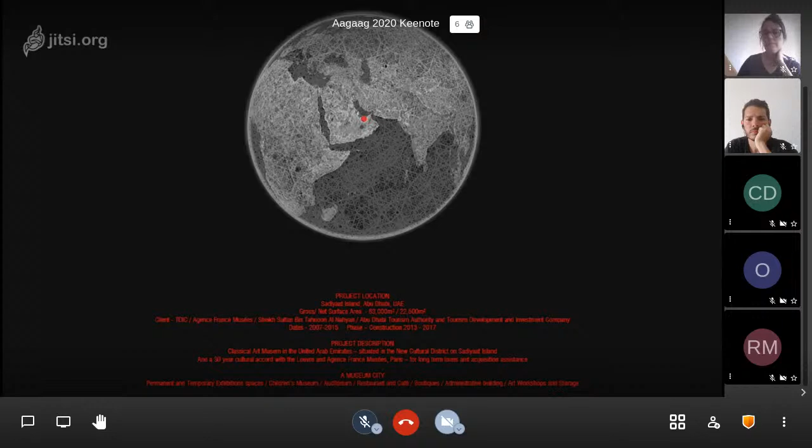The building is a classical art museum, and it's situated in the new cultural district on Saadiyat Island. There's a 30-year cultural accord with the Louvre and Agence France Muséums, Paris, for long-term loans and acquisition assistance. The museum is considered to be a museum city. It has permanent and temporary exhibition spaces, children's museums, auditoriums, restaurants, cafes, boutiques, an administration building, and art workshops and storage areas.

Saadiyat Island was conceived as a cultural district. Several well-known architects were to build renowned projects on the island. The AJN project is the Louvre Abu Dhabi. The Frank Gehry project, Guggenheim Museum, is also under construction, and there would have been, or will be, a performing arts center by Zaha Hadid, a maritime museum by Tadao Ando, and a Zayed National Museum by Foster and Partners.

Generally, when we begin a project, there are many areas of research for the concept of the design. And most of these areas of research are based on the content and the specificity of the place. There are three grand areas. One is the place, the geography, the history, the culture. In this case, it's where the desert meets the sea and that border. We also look very closely at the history and the typologies, and in this case, the museum city and the layering of the archaeologies of the area.

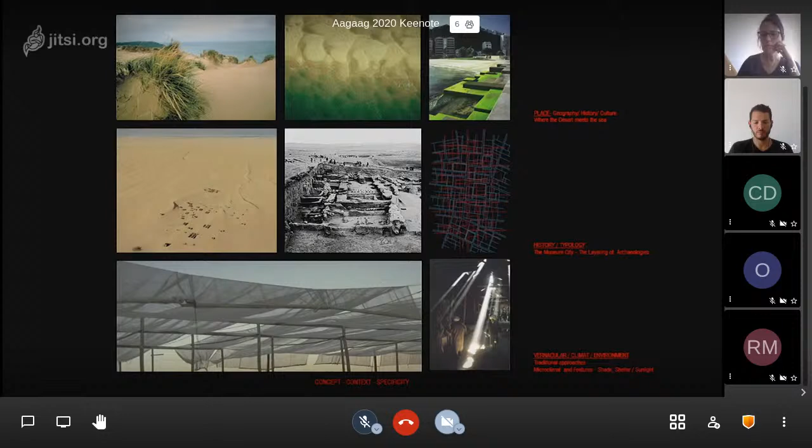And then there's the vernacular, the climate, and the environment. These are ways of looking at traditional approaches and dealing with the microclimate and features such as shade, shelter, and sunlight. These are some of the initial sketches done by Jean Nouvel. These are some of the initial massing plans, and there are two key elements. There's the water element, which is the blurring of the boundaries between the desert and the sea. And the second key element was the dome, and that was the incorporation of very specific light and shade.

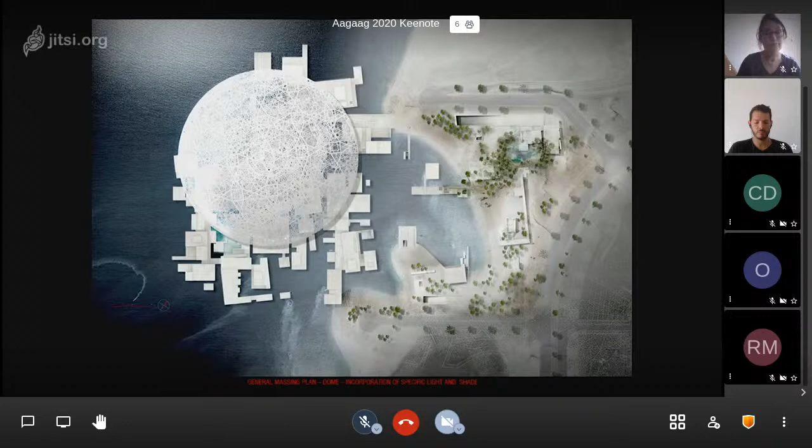The basic geometry of the dome. The dome is a slice of a 349-meter diameter sphere with a span of 180 meters and a rise of 25 meters. At the base, there's a support, a belt truss, which is 6 meters deep. There are also 4 structural support elements which span 110 meters between supports, hidden within the buildings of the museum. The primary structural grid is a structural steel space frame, 6 meters deep, made of 10,000 structural components, pre-assembled into 85 supersized elements, each weighing on average 50 tons.

Structure and cladding. There are 8 layers of cladding: 4 outer layers clad in stainless steel and 4 inner layers clad in aluminum. There are 7,850 unique stars, creating a layered series of geometric patterns, allowing for approximately 1.8% of the dome to be perforated. The base pattern is an isosceles triangle, repeated, rotated, scaled up and down to form a system of squares and hexagons. The pattern is then mapped onto the dome surface to be true at the apex and distorting outwards towards the perimeter.

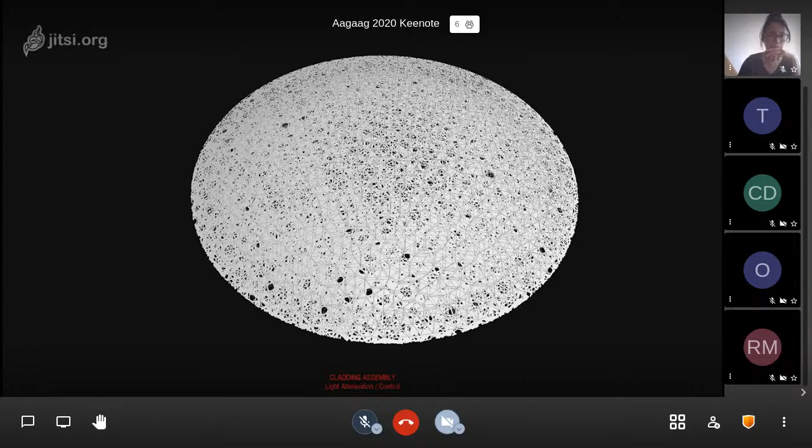And these are some of the studies and the long research that was done on the different openings within the dome. And images from the exterior of the museum and the dome. The dome acts as a light filter as well as a light source. And the research that was done through various mapping techniques.

There was a light attenuation map to analyze the light and temperature controls, an inverse lighting analysis, which analyzed the light and shadow, and a transparency map, which analyzed the perforations mapped out and translated. So these are views of the lights moving and the patterns moving and the different types of patterns throughout the day. And these were calculated with the angle of the light and the incidence of the type of light as well as the type of pattern.

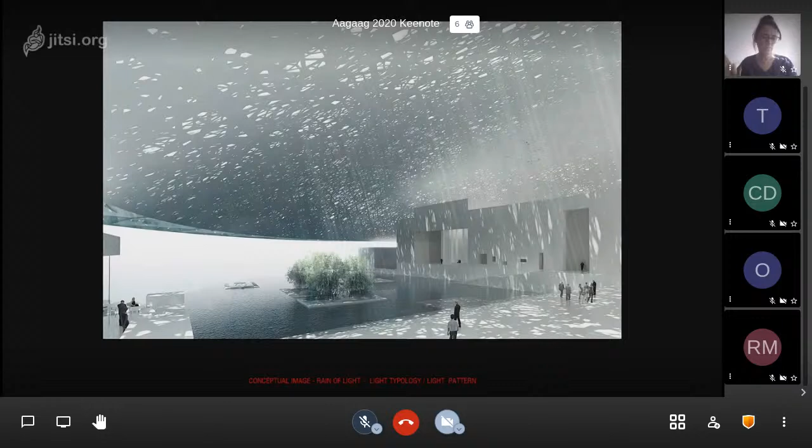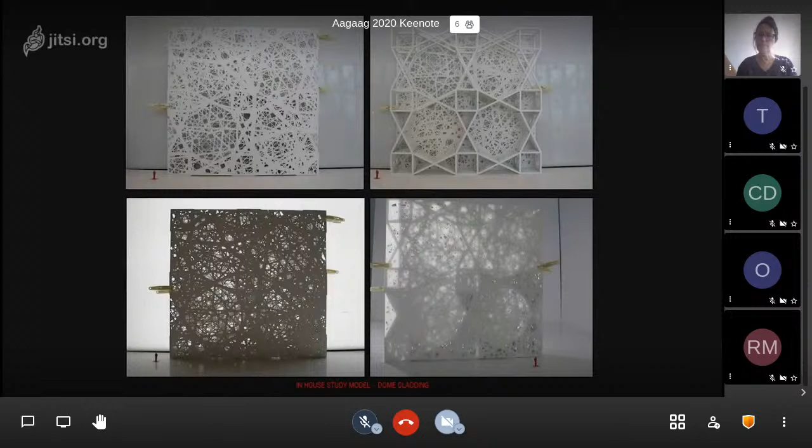And this is a conceptual image of the rain of light, the light typology and the light patterns. We did many study models, some in-house, to analyze the light, shadow, as well as the different perforations. These were done outside of the office. There was a prototype model done at 1:33 scale. And then there was a full-scale mock-up and prototype.

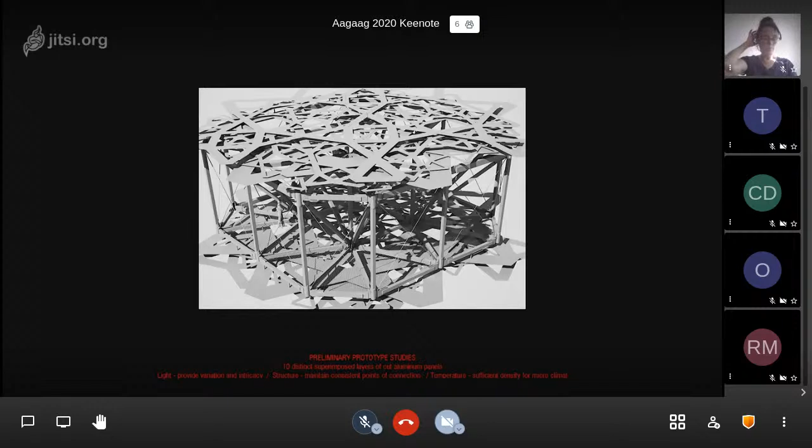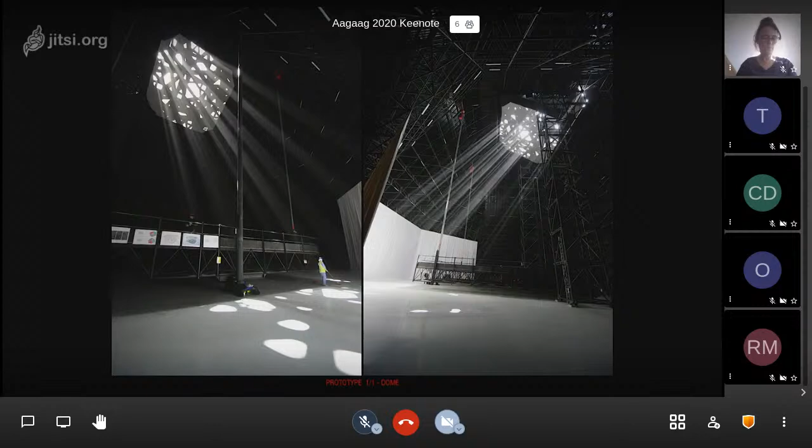And this is a view from the interior where the analysis was done on the different lines of the rain of light, as well as the light that was captured within the dome itself, and mostly the patterns on the floor and the walls as they moved throughout the day and changed their sharpness and their forms. We constantly refer back to the conceptual images while we're doing these studies to keep in tune with the original ideas that were put out in the 3D renders.

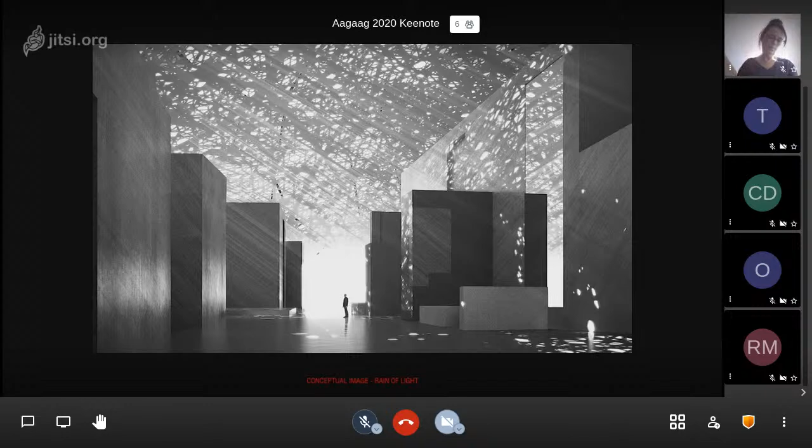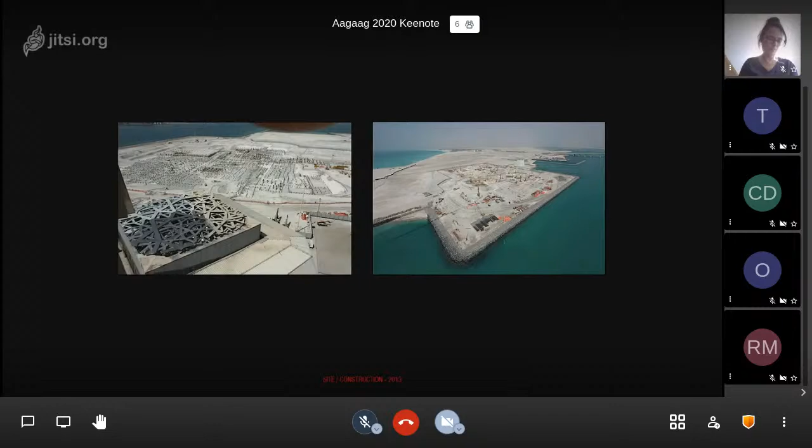So these are the first images of the construction site with the prototype to the left. The first images of the dome with the museum underneath, under construction. The patterning of the stars as they go into place on the dome. The positioning of the stars and the different layers. A view from a distance. And the last piece of the dome cladding was installed in 2015.

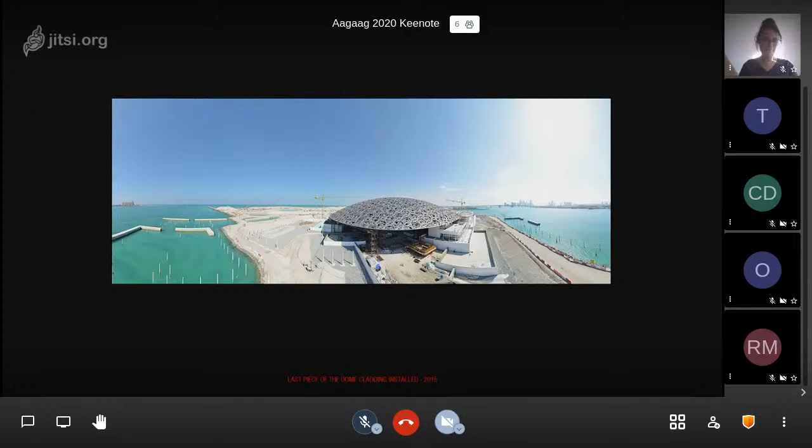And these are views of the final project from the interior inner courts out towards the sea. The inner courts looking up towards the dome, as well as the gangways inside the dome. And then the light patterns. So once again, the light was not just a rain of light. The light was also captured within the dome and lit up areas of the dome.

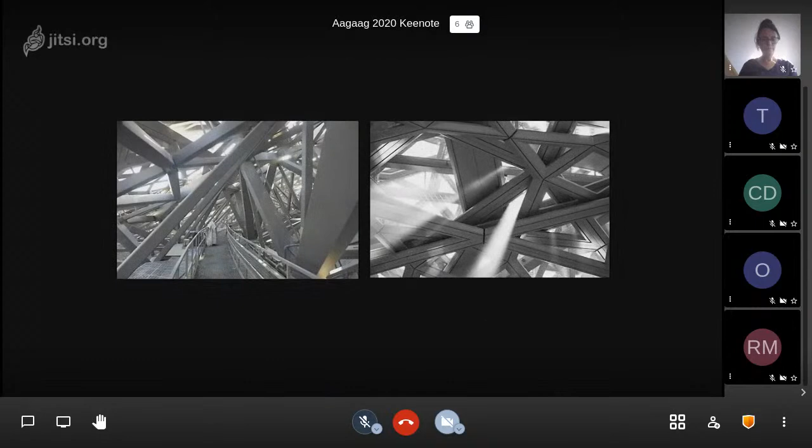But mostly the analysis was also on this kinetic form of light as it was transferred through the dome onto the areas below. How it moved, how it vibrated with the water patterns and the angling of the sun. At the end of the day, the patterns became very long and very soft. In the morning, they were sharp and much more concise. These are on the water areas. And as the sun goes down, the night views also have a kinetic to them, as if this was a celestial vault. The stars come out from underneath the dome.

We're moving now to Paris. And we're going to present the project called Tour Duo. So the client is Ivanhoe Cambridge and Hines, and the program is offices and hotel and retail, and a restaurant on the upper part of the first tower. We won this competition in 2012, and the construction started in 2017. We are going to deliver this project for the end of the year.

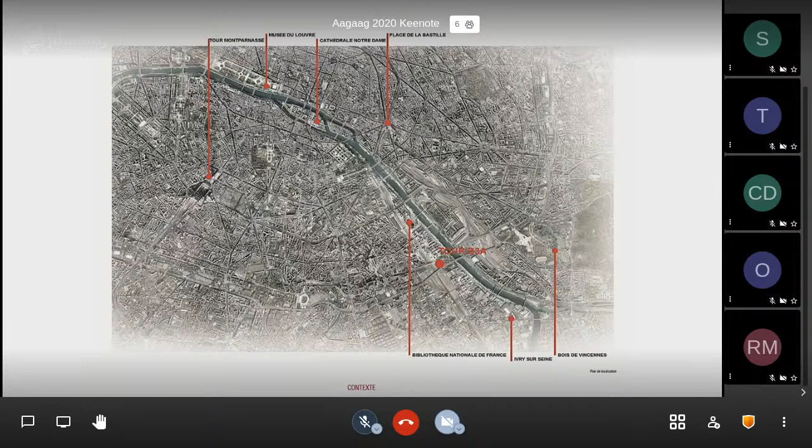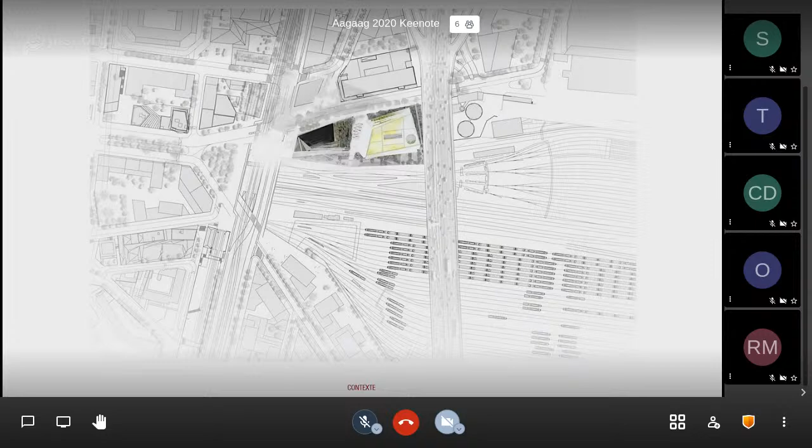So located in the eastern part of Paris, near the Seine, Duo is composed of 2 towers and a large public plaza. They are the last buildings at the end of the Avenue de France, and they are facing the Ring Road and an impressive opening on the railway. So the very idea from Jean Nouvel was to reveal this urban landscape, invisible from the ground. All the movement from the trains and cars crossing the bridge has to become part of the tower's identity.

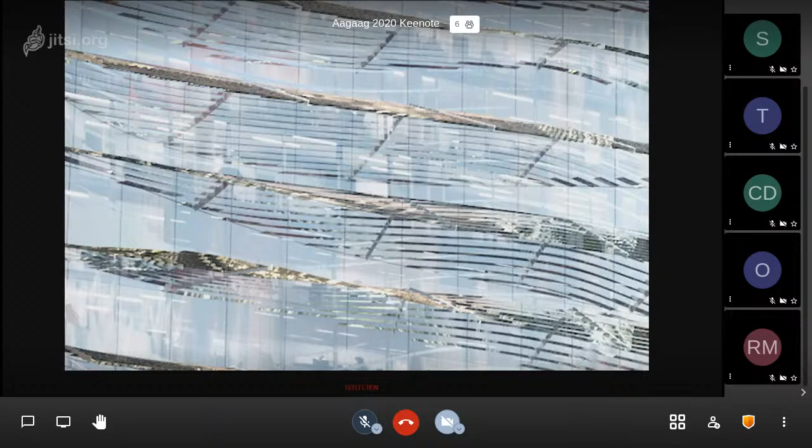So the project geometry starts from this intention to play with the reflection. At the very beginning, we wanted to create dynamic patterns composed of the reflection of the surroundings. Sometimes it could be really clear and sometimes more abstract, and to have an interaction between the inside and the outside of the building. In order to reveal the tower from the main avenue and capture the reflection of the ground activity, Jean Nouvel decided to dramatically incline the towers.

As you can see in this picture, the tower is slightly coming into the street. And all this inclination permits us to emphasize the reflection of the trains and the cars. Here are some renders from the very beginning of the project. So from the Avenue de France.

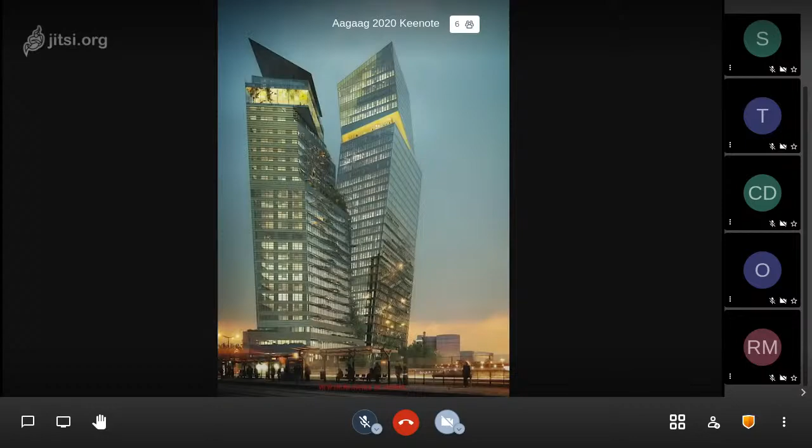And here from the Ring Road during the day and during the night. What is really important too, once the massing is decided, is the vocabulary. The vocabulary is each piece of this building had to refer to the world of train, vegetation, and moving lights.

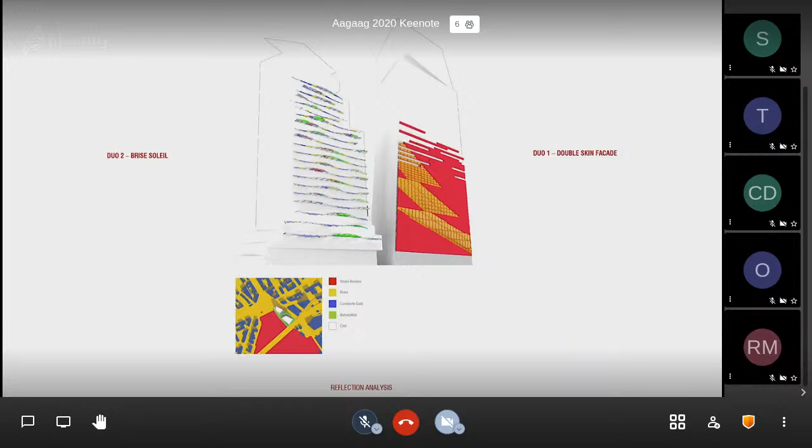So we chose to illustrate through two key elements of the project: the reflection of the double skin facade of Duo 1, that is the tower on the right side, and the curved brise soleil of Duo 2 on the left side. So the first step was to precisely map the context to validate and control the initial idea.

So here on Duo 1, we decided to use a double skin facade, and to realize this intention, we composed the facade thanks to 8 families. The first skin of laminated glass is porous and designed to both control thermal condition and reflect the context. The second skin ensures the air tightness and the fire protection thanks to the catwalk and the shadow box.

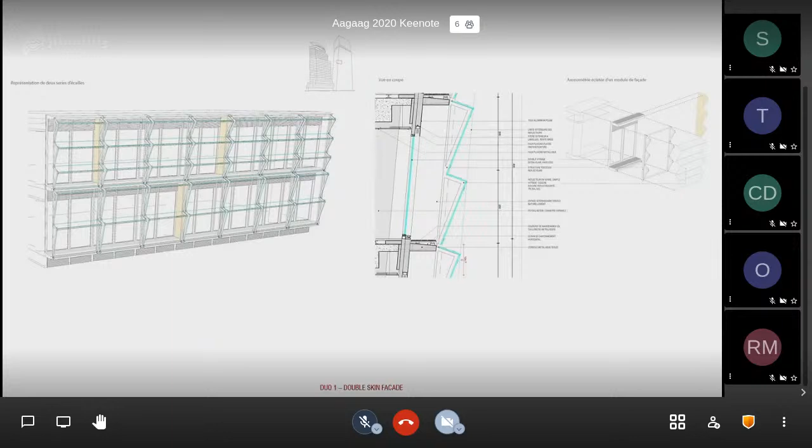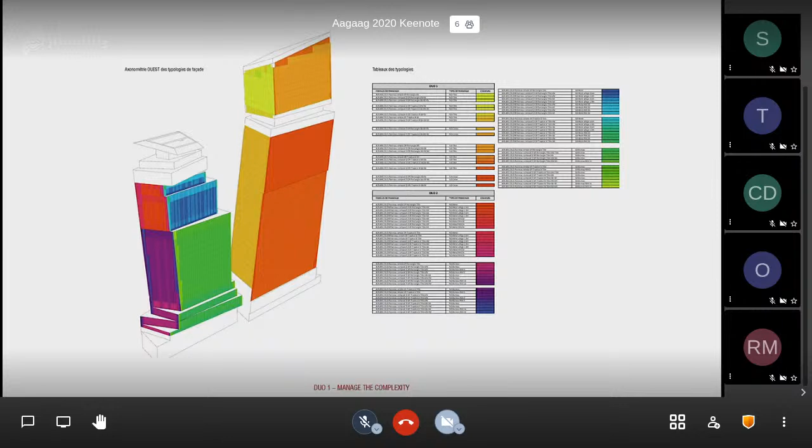All those geometries are drawn in a BIM model in which all facade families are precisely referred and informed. In this BIM model, we have all the information about the curtain wall and all the information about each piece of glass. So if there is an element like the height of the floor that is going to change, we are able to adapt all the project.

One important point was to control the impact of the sun reflection on the ring road, and so we adapted the scale and the angle to comply with the city ring road requirement. As you can see on those slides, we are sure that we are not going to have any issue with the cars because of the reflection of the sun on the road.

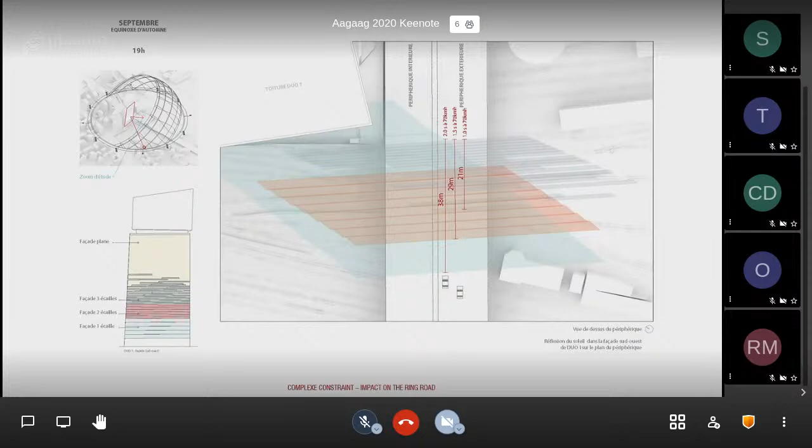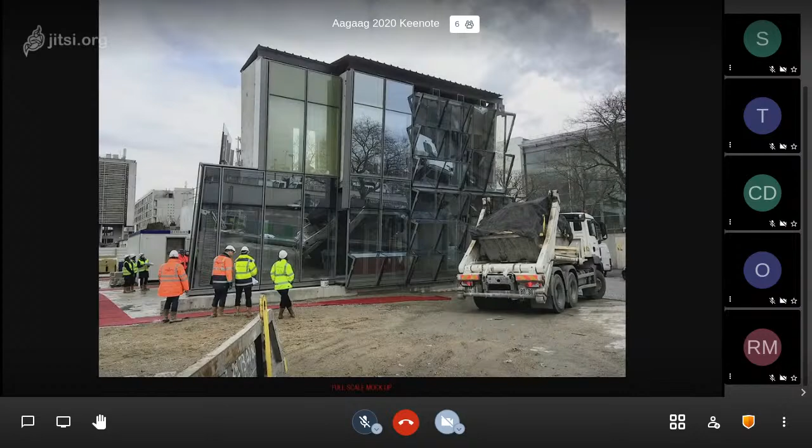We always control the geometry thanks to renders and thanks to visual mock-ups, like small 3D printed prototypes like this. And when it's decided, we jump to the full-scale mock-up, as you can see here, and we were really happy to see that the effect that we were looking for was present.

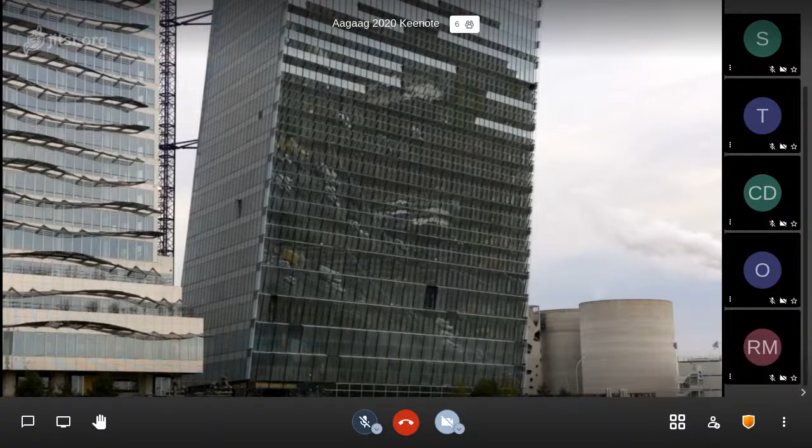Here we are going to present you a small video because this effect was really important for Jean Nouvel as a dynamic effect. And all the cars are visible from a pedestrian point of view, and so all the context is revealed thanks to the tower.

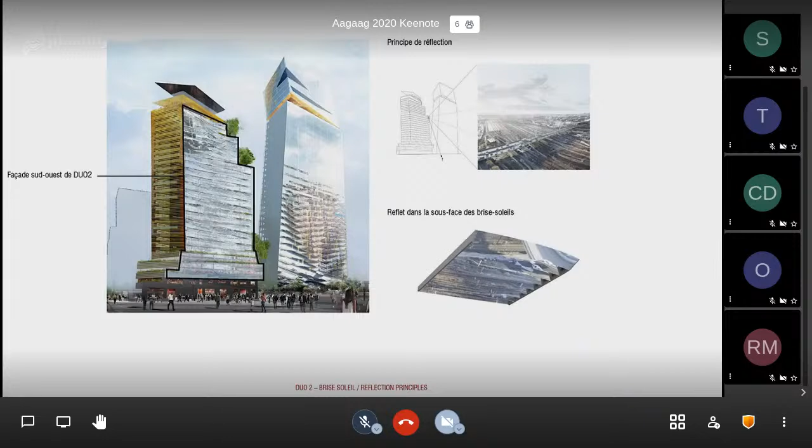The second element is the brise-soleil of Duo 2, and in order to realize the intention of this wavy reflection, we imagined a highly reflective curtain wall with a curved brise-soleil. The geometry is a balance between needed solar protection, clear view visibility wanted from the client, and important structural constraints, especially from the wind.

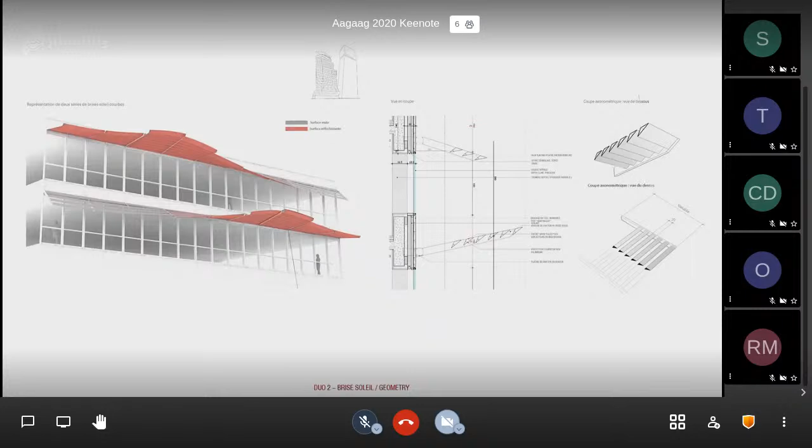Each blade is a 3-meter aluminum triangular profile combined with a 2 millimeter thin sheet of reflective steel. We control all the time the effect from the inside too, with this render, for instance. And all the geometry is coming from a complex computational design which takes in consideration the initial graphic wavy idea and the construction constraints. Here, from the generative surfaces to triangular profile and to curvature optimization.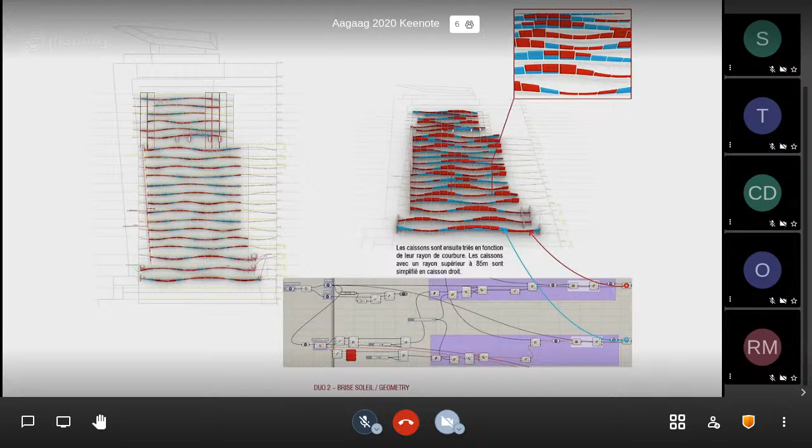Indeed, to reduce the cost, we sorted all the blades according to the curvature and achieved a simplification of 50% of the blades, that we transformed to straight profiles. Here is a render video to control the large-scale effect. And it's like if you're moving away from the tower and all the surrounding is playing with the sky and everything is moving into this facade.

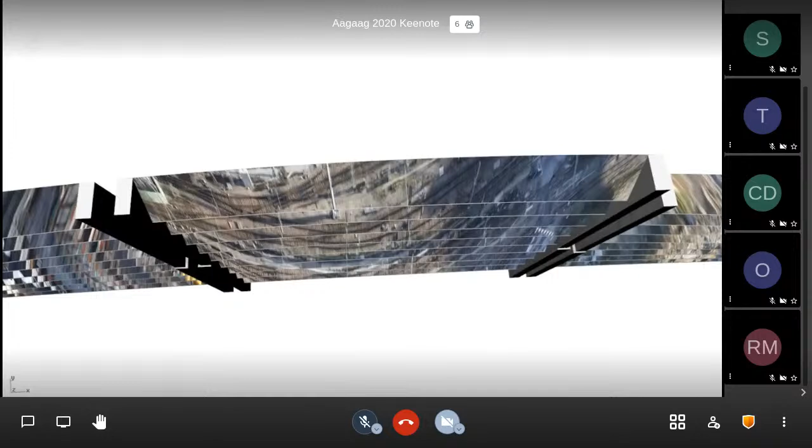When you're getting a little bit closer, you can start to see the context and how the railway is creating a really abstract motif thanks to this triangular element and the reflection of the brise-soleil.

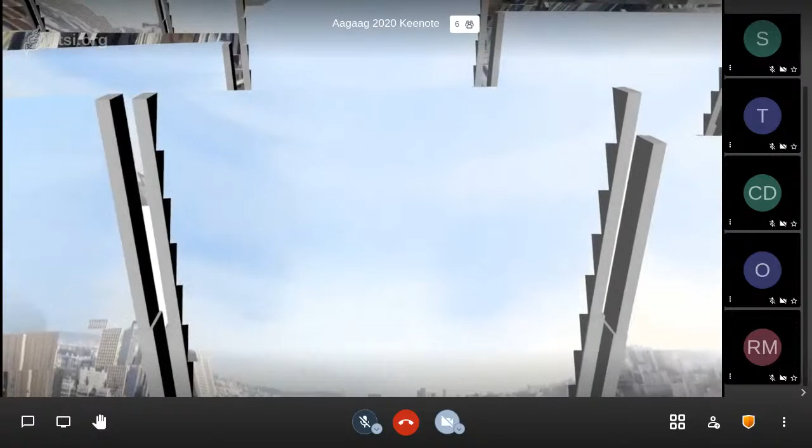So all these elements are confirmed thanks to models and visual mockup again. So this is the really first visual mockup we made. So it's 3 pieces of aluminum. We tried in steel, in aluminum, different metal. And here is this 1-scale blade in reflective steel. Full-scale mockup, and some images of the construction.

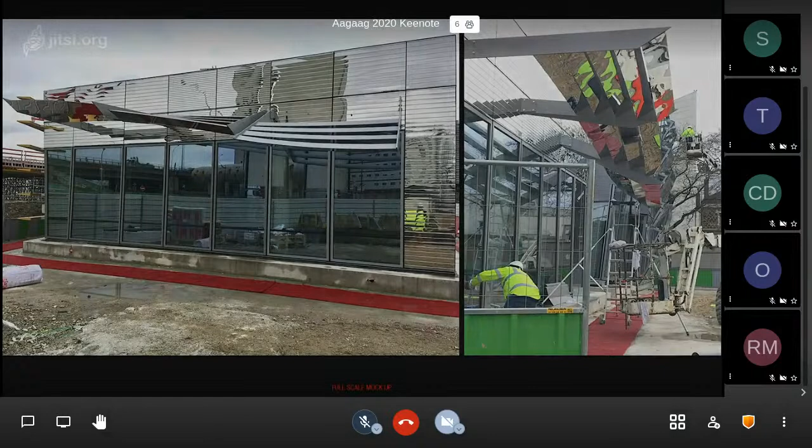From the Avenue de France, we slightly distinguish the facade and the brises. And when you arrive near the tower, the effect becomes more powerful, and the surrounding is playing into this facade.

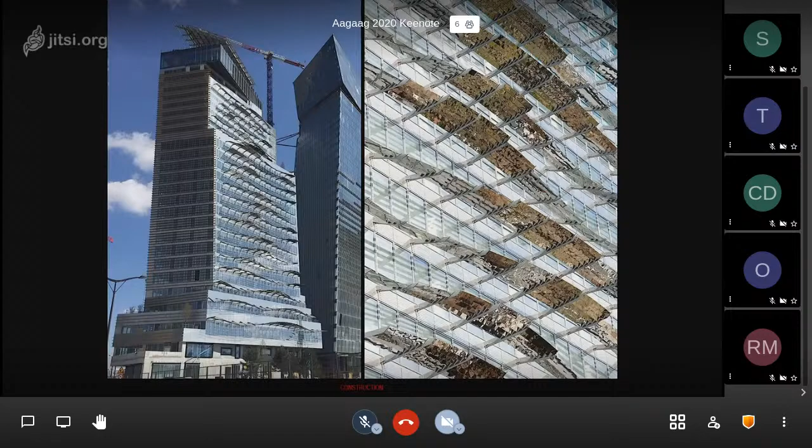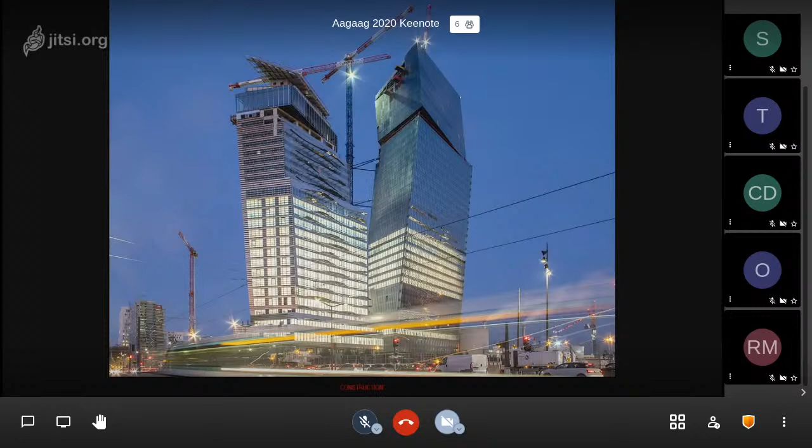It's really interesting to see it by night too, because when you're on the plaza, near the tower, you can see the light of the train going through all the facade. This is basically 1 week ago, and as we said, this project will be delivered by the end of the year.

The next project and final project is the Matarazzo Tower in Sao Paulo, Brazil. One of the original rendered images, conceptual images. So the location is the capital, Sao Paulo of Brazil. The project gross to net surface area is 54,000 square meters to 36,700 square meters. The height of the tower is 93 meters.

There are 22 stories. The client is Alexandre Allard, and the design dates were from 2012 to 2016, and construction from 2017 to 2022 will be the completion date.

This project is a renovation and a redevelopment of the historic buildings of the Matarazzo Hospital and site into a multi-use hospitality, office, residential, and hotel complex. It's also a revitalization of the urban center of the Paulista area in Sao Paulo. The high-rise tower, combined with the Matarazzo maternity ward, will become a 5-star Palace Rosewood Hotel.

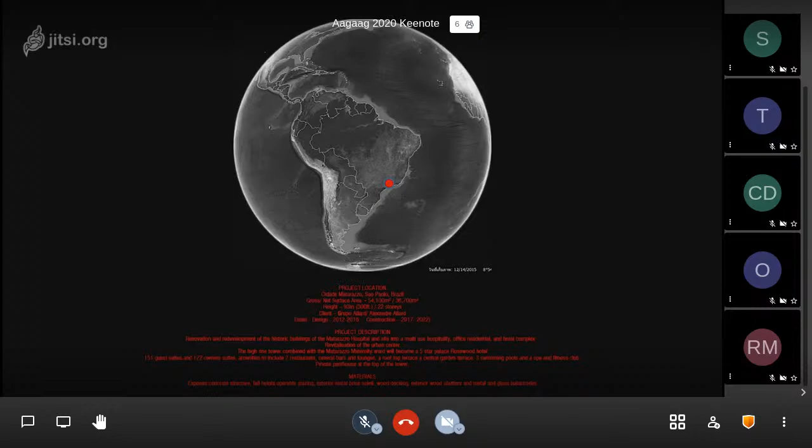151 guest rooms, 122 owner suites, with amenities including restaurants, bars, lounges, terraces, gardens, swimming pools, a spa, and a fitness club, as well as a private penthouse at the top of the tower. The material... one of the prime conceptual elements that was used on this project.

Once again, we go from the concept to the context, the place, the geography, history, and culture, the density of the city, the vernacular and typologies, the layers and scales and patterns of the traditional favelas, as well as the brise soleil. Being a temperate climate, the brise soleil are often used in Brazil. The climate and environment allowed us to interfere the exterior with the interior and bring the gardens inside.

This is a sky view of the actual site, which is in the red square, and you can see the old hospital, as well as the surrounding density. The main idea for this context was that within this incredibly dense area, Matarazzo traditionally represented a clearing, and this would be a clearing in the forest of urban density.

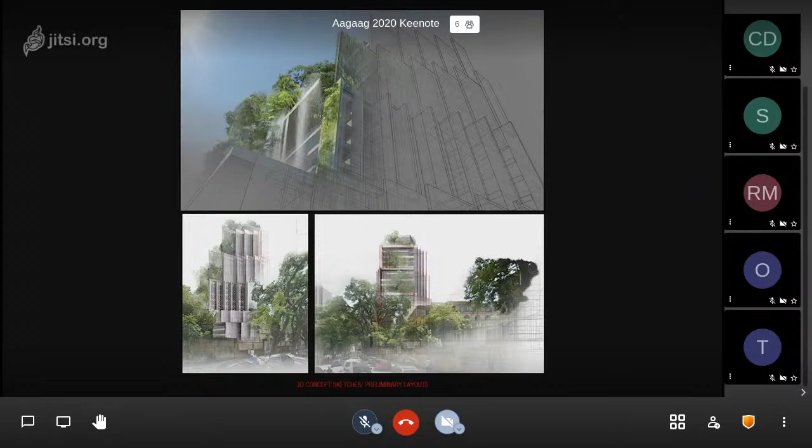So these are some of the preliminary concept sketches by Jean Nouvel, and some of the preliminary 3D concept sketches and layouts where we see the integration of the green into the layering of the external cladding areas. These are more 3D sketches of the preliminary layouts where we start to define how the cladding areas are layered and how they are opening one to the other.

And some of the final concept images where we see the different brise soleil and the different greenery which is incorporated into the building. Because this was such a dense area, one of the ideas for the brise soleil was, of course, not just to protect the views in, but to allow for an animation of the views out.

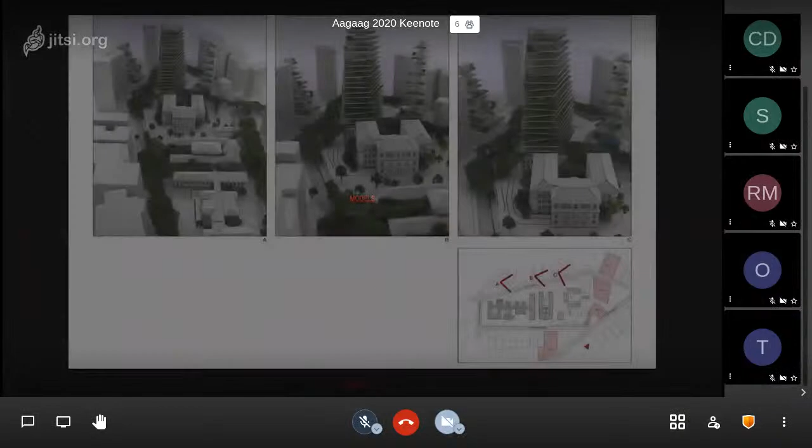So we did many study models. These are some of the preliminary study models. Also preliminary study models where we started to define the layering of the brise soleil and the exterior cladding. A more evolved study model, which was built in Brazil, and some of the final showroom models. So the preliminary cladding and brise soleil studies.

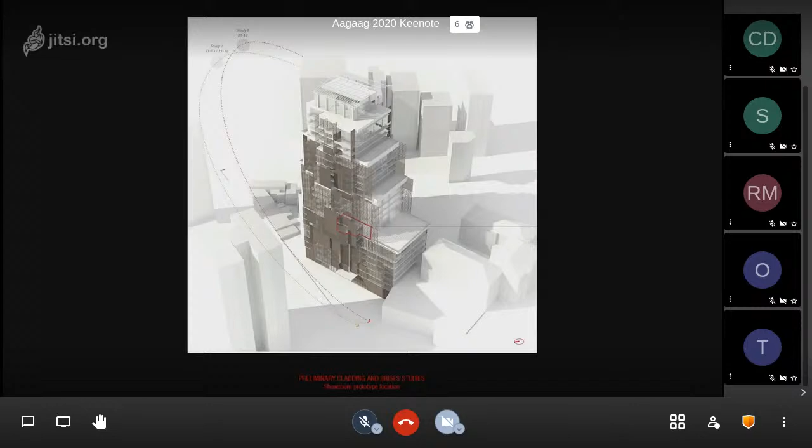We did a prototype. The prototype was a showroom, so we were allowed the opportunity to define a duplex apartment, a simplex apartment, and a hotel room. The location is shown here on the Itapeva facade to the south. These are some of the 3D images of the showroom, which show the different studies on the brise soleil, as well as the cladding and glass splits.

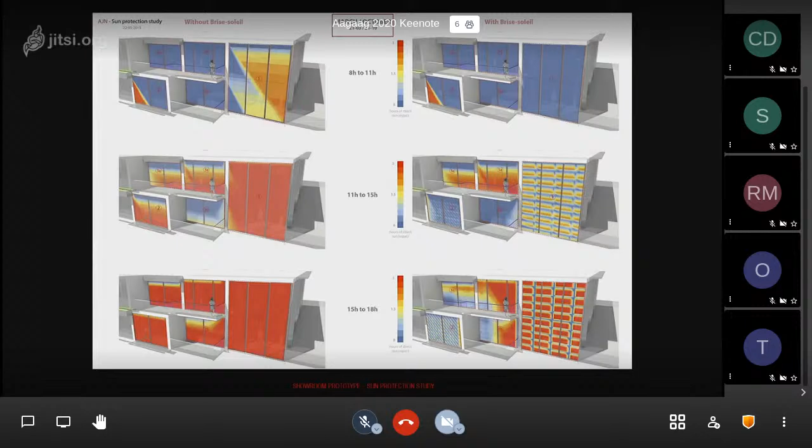The geometry and density of the brise are driven by the heat calculations as well as the structural constraints. This is a sun protection study. On the left, you can see the glazing without the brise, on the right with the brise, which allowed us to calculate what the brise needed to be in terms of sun protection, intimacy, as well as views.

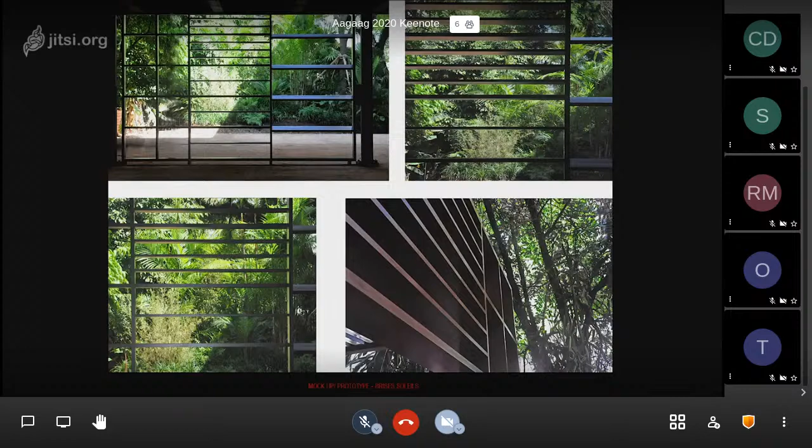These were one of the preliminary mock-ups of the brise soleil, which was done at the showroom on the area on the side of the garden. And this is the terrace area looking into the duplex apartment, which was built for the showroom mock-up.

These are views from the inside out into the garden. The garden was also planted specifically for the prototype. To the left from the ground floor level and to the right from the mezzanine level. Some views of the interior and exterior brise soleil.

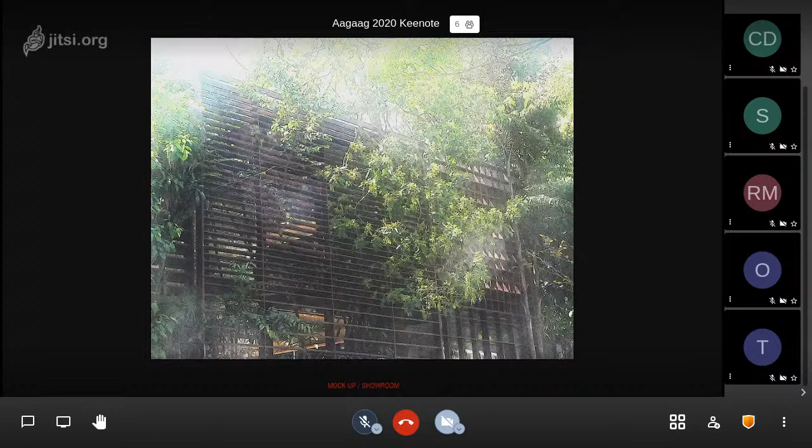Some of the smaller terraces at the showroom, which were areas which included layering of the facade as well as the brise soleil; included in the layering was the reflection in the glass. And these were some of the brise soleil that were done to the exterior of the building with vegetation almost incorporated into the brise soleil. There was also a prototype that was done for the facades as well as for the brise soleil and the terrace areas.

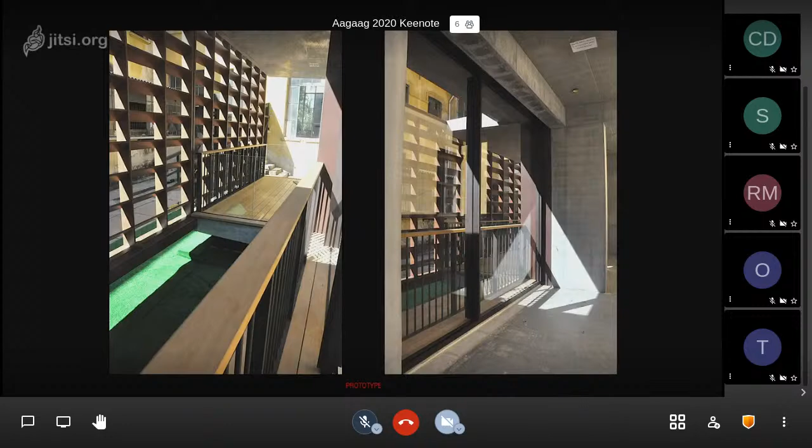This tested a lot of the different treatments to the brise soleil, which was a simile Corten steel, although these are aluminum extrusions, and the color is done with a fusion of a film onto the brise soleil. This was one of our first projects with exposed concrete, so it was interesting to see the concrete and how it reacted. We tinted the concrete darker, and that was a large amount of research that was done so that it didn't separate out, which you can see in the prototype. That was fixed for the actual construction.

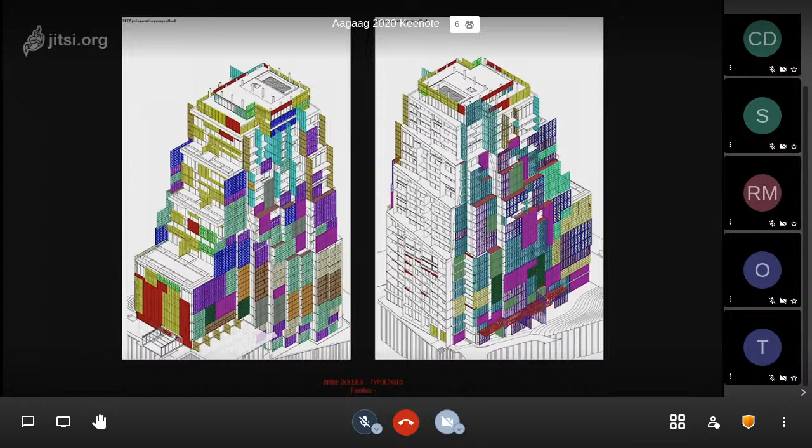The brise soleil, once again, we worked in families. So there were different typologies that were used throughout the building. Here we can see a sample of how they were calculated into the families. There were approximately 21 different families, and the typology analysis took into consideration the program of the interiors, the intimacy levels, the sun protections, the views in and out, the lighting patterns, as well as determining the orientation, the element patterns, the dimensions, and the spans. Of course, there were subfamilies to the 21 families.

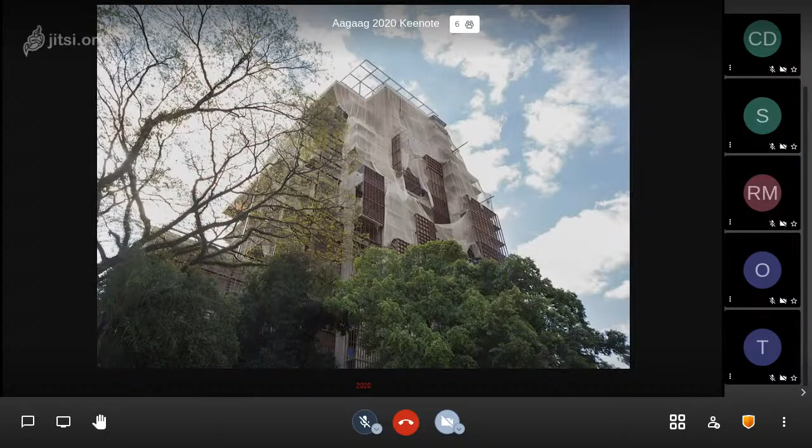And this is the construction. Here we see the Matarazzo complex with the tower at approximately level 6 in the middle right-hand corner. This is the Matarazzo complex where we're almost at the topping out. We're at approximately the 21st level. This is an image in 2020 where most of the brise soleil have been put in place and they're installing the glazing. These are some of the views of the different brise soleil from the southern side.

The southern and the north side had most of the brise soleil because that's where the buildings and the proximity to the other high-rise buildings were. So as a protective measure, all of the brise soleil were put onto the north and the south, and the two other west and east facades were open, one to the city and the other to the garden with the terraces. Here we see once again the south side. This is the side facing the garden where the terraces will be implanted up and down this facade. Most of the facade will be green. This facade is relatively open. It looks out onto the Matarazzo complex.

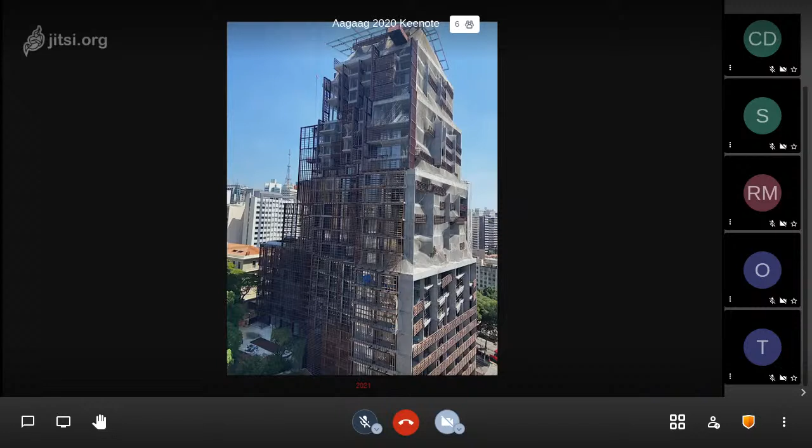This is the Itapeva Plaza, which is the entry to the south side of the building. And this is the garden side of the facade, which is to the north. It also includes many brise soleil. And we see to the right-hand side the west-facing facade, which is open to the downtown views. We have a short fly-through film of the latest construction.

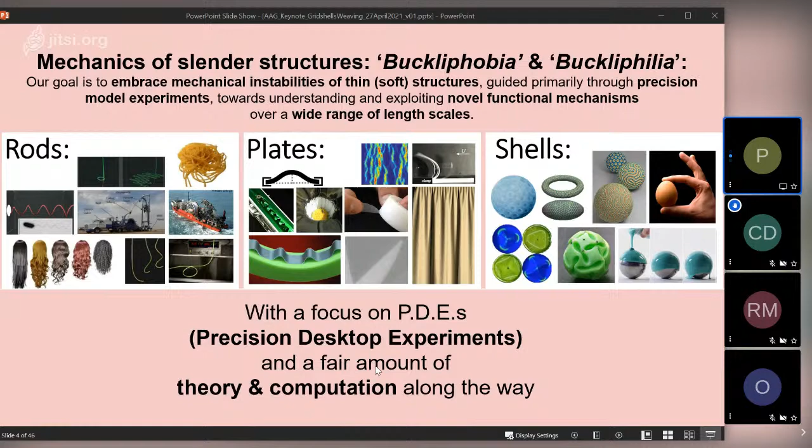And so maybe the secret sauce of a lot of what we do, which we jokingly call PDE, standing for Precision Desktop Experiments, is an experimental methodology to scale up from the small scale to the centimeter, or down from the kilometer to the centimeter, towards really coming up with insight into these type of problems. And we also do a fair amount of computation and theory, but we're primarily an experimental lab. So before I really get into the topic of the talk, just giving you examples of some other types of questions that we're currently working on.

So we're very interested in the mechanics of knots, so how do knots work, with an eye towards developing a better understanding of surgical sutures. We work on these classic questions of shell buckling. So what are the knockdown factors of a spherical shell? Still a largely open problem, given the imperfection sensitivity of these kind of structures, and we're doing lots of experiments on this front. And we also like very much problems that involve interaction between fluids and solids, such as what happens in the flight of some funny-looking insects.

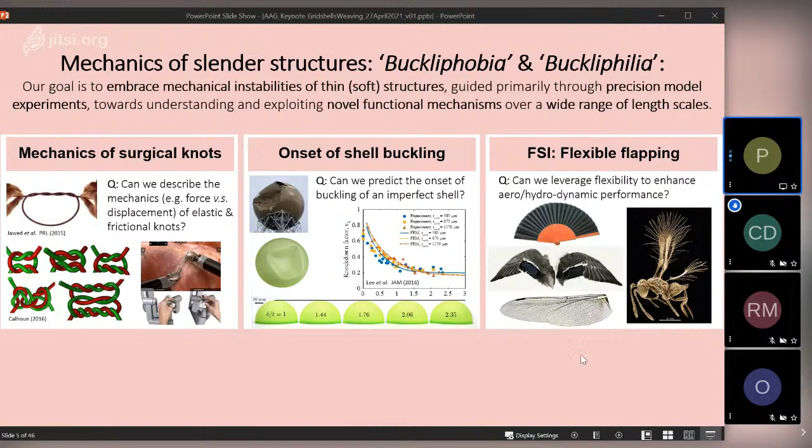So today the kind of functions that I want to focus on in utilizing buckling is using buckling for shaping, as for example what you might find in a tent, where you compress the end nodes to a distance that is smaller than the arc length of the beam, and as a result it buckles into 3-dimensional space. And depending on how you dispose these structural elements in your initial layout, you can get shapes that are interesting. And so just an example of our view on buckliphilia. Now, these kind of principles are used or have been used recently also at the small scale.

So this is a small video that hopefully doesn't get too messed up with the frame rate through YouTube, where buckling for shaping was used in stretchable electronics. So this is work coming out from the groups of Yonggang Huang and John Rogers at Northwestern. And here, the scale bars are just a few microns.

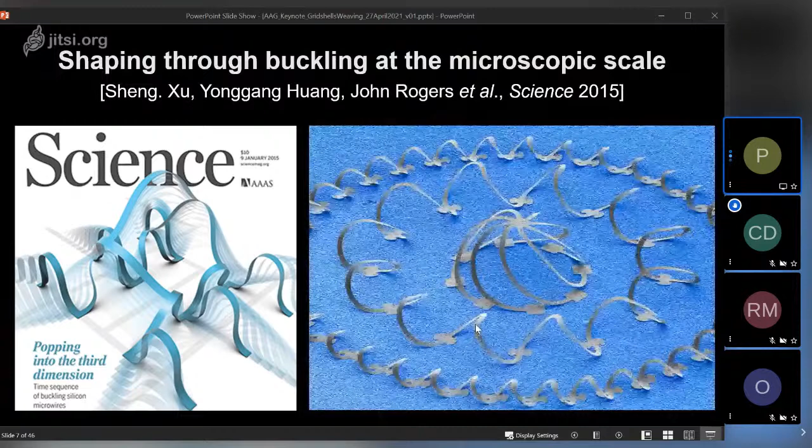And so by utilizing these mechanical instabilities, they were able to come up with these incredible micron scale stretchable electronic structures that have a variety of functions. For example, here's a solenoid that is used as an antenna. And so again, the theme of buckling for shaping.

Okay, so today I want to tell you about a couple of projects, one involving the geometry and mechanics of elastic grid shells. There's a couple of papers from the past couple of years that detail what I'll be telling you in passing, as well as the triaxial weaving, not in the standard way of weaving with straight ribbons, but using initially curved ribbons to essentially generate possible shapes that were not available traditionally. And here this is work that was inspired by some interactions with Alison Martin, who's a weaver and taught us everything that we know about weaving.

Okay, so let's get going with grid shells. I'm sure in this community everyone is familiar with these reticulated structures, the most famous one probably being the Mannheim Multihalle in Germany by Frei Otto from 1975. And here I'm borrowing a sketch from a Thinkshell from Olivier and company that illustrates the basis of what is a grid shell.

So you start with a layout of rods that cross at specific nodes. You then compress the outer boundary of this initially planar layout. So all of these beams or rods essentially buckle out of plane. And then you add an additional array of elements that essentially triangulates the structure and locks the structure in place.

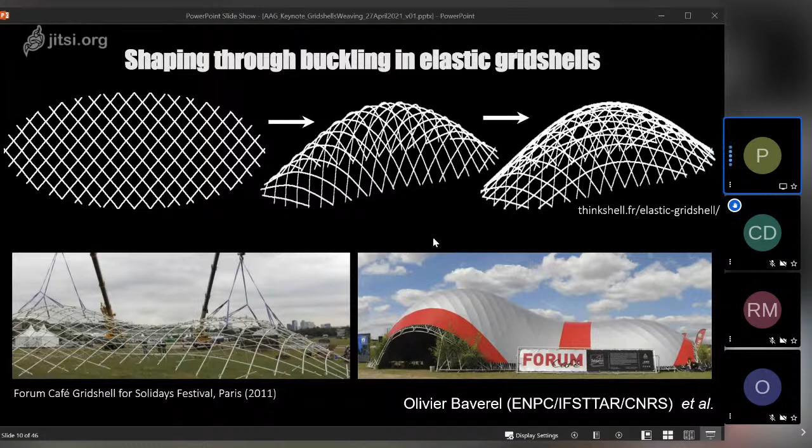And for the rest of the talk, I guess I'll start from a slightly different point of departure with these PDEs, these precision desktop scale experiments, towards trying to gain some further insight into these geometric mechanisms and to illustrate these geometric mechanisms in a tangible way in a desktop experiment.

Okay. So this is our experimental system. We start with a quadrilateral array of rods that are connected at joints. The rods are made out of nitinol, a superelastic material that can undergo large curvatures without plasticity. We then have joints that are made out of this polymeric material that freeze the position of the crossings, but have essentially negligible torsional stiffness. And then the boundaries are pin connections that we 3D print so that the structure can freely choose the shape that it wants.

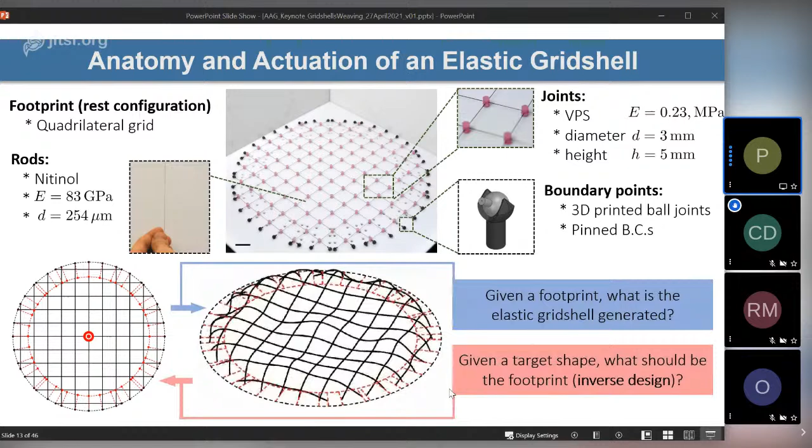And so what we want to address is not so much the process of forward design, of starting with a 2D layout and seeing what happens, hoping for the best, but trying to say something about the inverse design. So if you want a certain target shape, what is necessary in terms of the original 2D layout to get there. And we'll focus on very simple shapes because we're really trying to get some fundamental understanding on some of these systems.

Okay, so this is how we built our PDE on grid shells. These are hands of my former PhD student, Changyeob Baek, the lead author of this work. And so we first lay out the nitinol rods. We then use this silicone-based polymer to essentially fabricate the joints through a casting procedure. Then very, very patiently, we attach these pin connections to the outer edges.

And then we have some footprint templates onto which we attach these pins to realize different shapes. And so I'm already giving you the final result here of one of our target structures, which was a perfect hemisphere. And you see that there's a lot of distribution of shear angles across the sphere. The spacing of the nodes at the boundaries is also non-homogeneous, and so we want to try to get some insight on that.

Now, in addition to the experiments, we also do numerical experiments. Here we use a technique called the discrete elastic rod method, introduced by Bergou, Grinspun, et al. more than 10 years ago. This is a discrete language for elastic rods, where the discretization starts at the level of the energy functional and then employs some tools from discrete differential geometry to be able to compute the equilibrium shapes for rods in complex geometric nonlinear configurations.

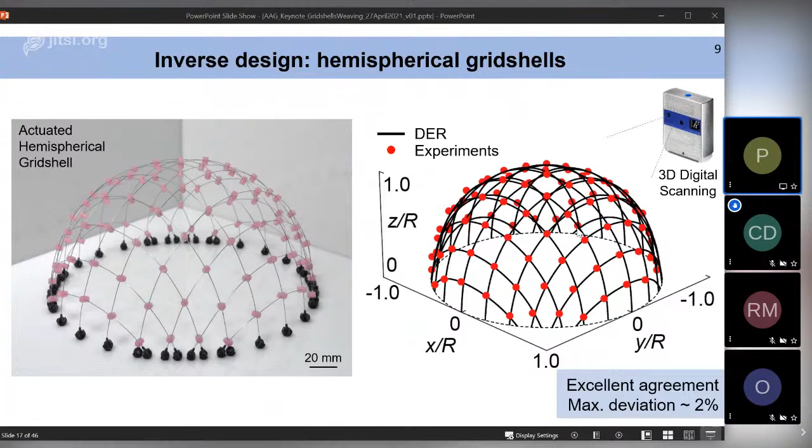So now the theory of Chebyshev. This was work done in collaboration with an applied mathematician currently in Berlin, and he pointed us to previous work that he'd also done with Mark Pauly on Chebyshev nets. So Chebyshev introduced the simplest description of a fabric, which is that of a quadrilateral grid, where the only thing that can happen is shearing at the node. So there's a warp direction and a weft direction.

And so a Chebyshev net is essentially a map from a 2D domain to three-dimensional Euclidean space that preserves all distances in the two directions of these rods. And so the only thing that can happen is that there's shear at these crossing nodes, and the corresponding governing equation for a Chebyshev net is essentially relating the curvature of the structure to the shear angle omega, and U and V are the coordinates along each of the rods.

Okay, so this is a hyperbolic PDE, where interestingly the characteristics are actually along the directions of the rod. And we'll see that this has some impact in non-local effects, as we know for these hyperbolic systems that are realized concretely physically in grid shells. So the solution for the Gauss equation for a Chebyshev net was arrived at by Chebyshev in 1878, and it was later revisited by Ghys, a mathematician from Lyon, I believe. And we can plot it, and we can check if it works in comparison with our experiments.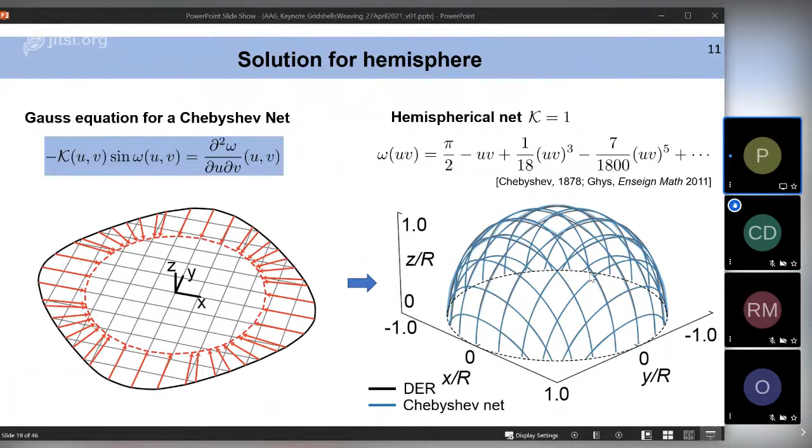Now, this is actually something that was a great surprise to us. I'd been curious about pasta strainers for quite some time. They are a Chebyshev net. They are hemispherical. And my question was, well, maybe the Chebyshev solution might actually be hidden in a pasta strainer. And so we bought many pasta strainers.

We cut them along the boundary. You then flatten them out. You bring all shear angles back to 90 degrees, and lo and behold, look, beautiful. So there's no fitting parameters, and the Chebyshev prediction for the rounded square was actually lying all along on these pasta strainers.

And so again, this is not just a curiosity from differential geometry. It can really be realized in a system as simple as an item that you have in your kitchen. And so geometry really drives the 3D shape of these physical grid shells. And in this case, the pins are held by friction, so there's quite a bit more physics going on. And it's beautiful that geometry takes such center stage.

Now, there are, of course, other solutions for Chebyshev nets existing out there for cylindrical shells, for hyperbolic shells, which we have tested and compared with our computations. Again, black DER, blue Chebyshev, and you see that once again, geometry gets you most of the way.

And so this is interesting because now we can start concatenating some of these unit cells to build up more complicated structures. We can, for example, concatenate a quarter-sphere and the cylinder to end up with a cylindrical-like dome. We can concatenate a quarter-sphere and the saddle to end up with a peanut-like pavilion, which we've also realized in experiments. Again, top is the actual experimental realization, bottom is the DER computation on top of experiments, and it's beautiful how predictive we can actually get to these designs.

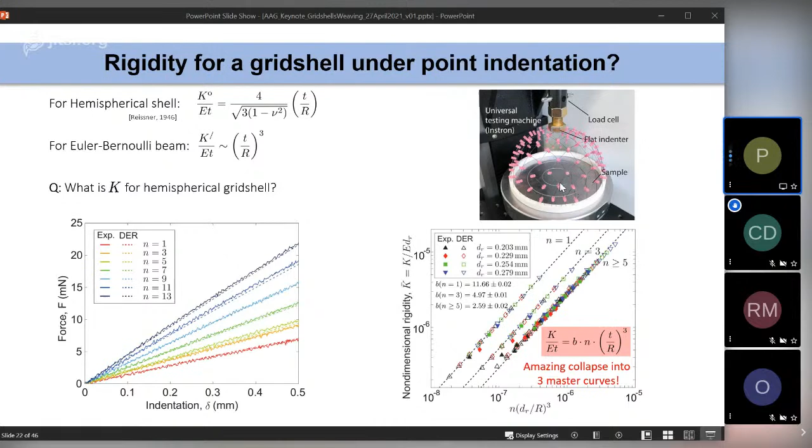Okay, but before we get too technical, I want to move on to the second topic of triaxial weaving with initially curved ribbons, and this is to be contrasted with something that I'll call traditional weaving, which is what you'd see in straw hats and baskets, where the ribbons are naturally straight. Okay, and this is work done again with Changyeob, Sam Poincloux, Tian Chen, and our artist collaborator Alison Martin. Okay, so this is what really got us started. We saw some of the absolutely phenomenal examples that Alison has on her Twitter and Instagram page on triaxial weaving.

And here I'll do some advertising on the name of Alison. You might be interested in reading a wonderful profile that the New York Times wrote about her and her work, and a workshop that she did in Sao Paulo. So this is probably one of the single connections I have with the previous talk. And I encourage you to read this article. It's very inspiring, and it was wonderful to see Alison featured that way. And that was a couple of years ago, I believe. I should have put the specific reference here, but if you search for Alison Martin, New York Times, you'll get to this article.

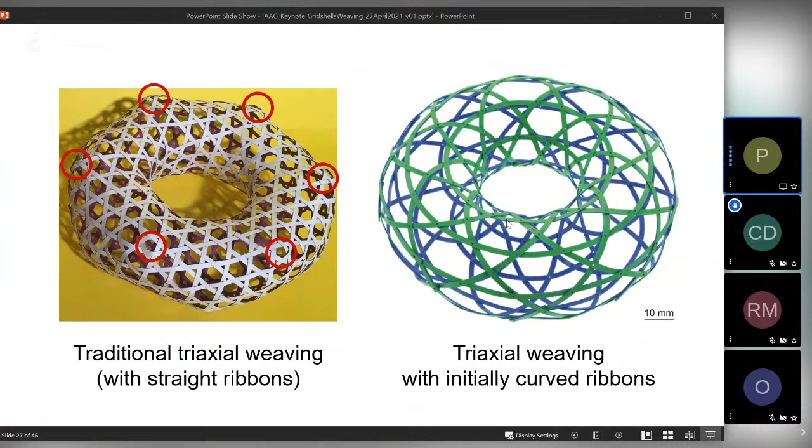And what I want to tell you in the next 10 minutes or so is what we have done to essentially bypass these regions of localization, and we end up with much smoother woven structures that look like this. Okay, so here you don't really see any localization of curvature around the structure.

Okay, so focusing first on traditional weaving, as some of you probably know, three-dimensional shape is generated here by injecting singularities. In a triaxial weaving of hexagons, when you inject a singularity of a non-6-gon, something other than a hexagon, you generate three-dimensional shape. If the n-gon has less than 6 sides, you inject positive curvature. If it has more than 6 sides, you inject negative curvature. And this is a very nice illustration from this paper that shows this mechanism.

Okay, so we follow our usual precision desktop experiment approach, the PDE. We fabricated unit cells; we want to really study the unit cell in detail. And so we use some ribbons that have a composite of metallic particles for reasons that I'll explain in a second. And so this is the unit cell that we want to study. At the center of the unit cell, there's an n-gon that is defined by the edges, or essentially by the center line of the ribbons, okay?

And so now one might ask, well, what's the curvature of the n-gon? Here there's no curvature in the void because there's no material there, so I have to talk about an integrated quantity, the integrated Gaussian curvature, where n stands for the number of sides that I have on the n-gon. Okay, so maybe I don't need to talk too much in detail about how we fabricate these systems. The unit cells are centimetric.

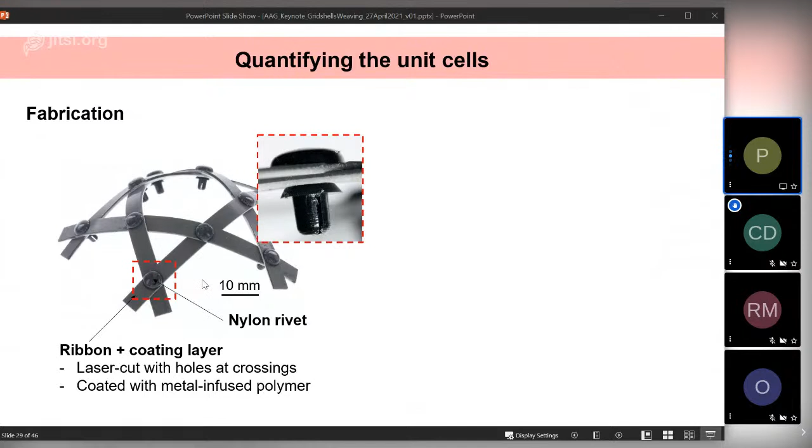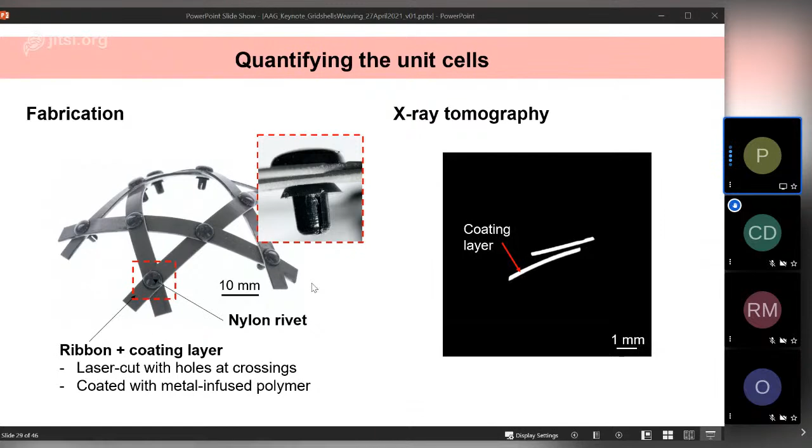And then importantly, experimentally, we put them in an X-ray microcomputed tomograph to get the full geometric information that you might ever need. Because we have these metallic particles on one half of the cross-section of the beam, we can filter them out so that we can separate the upper and the lower filament. And from that, we can do some heavy image processing analyses to extract the center lines. And by the way, I want to emphasize this is experimental data. The center lines are the series of dots here.

And in addition, we can also compute the material frame. For those of you who are familiar with these kinds of systems, the D1, D2, D3 triad that essentially tells us the orientation of the ribbons in space. So we basically have all the information that one might need to describe this system. In parallel, we also do some FEM, done by Tian Chen, a postdoc in our group. And we can then compare the data and try to understand.

Okay, so regarding the integrated Gaussian curvature I mentioned earlier, the Gauss-Bonnet theorem gives me a relation on how the curvature depends on the geodesic curvature of the center line of the ribbons, as well as the internal angles of the n-gon.

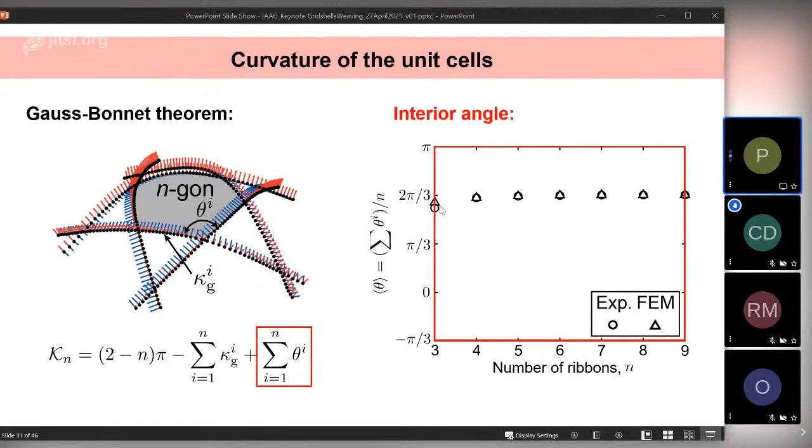Okay, and so in this case of traditional weaving with straight ribbons, we basically went and tested each of these various quantities in detail. So for example, here I'm plotting the sum of these angles of the n-gon as a function of the number of ribbons, and you see that everything stays constant, so around 120 degrees. If we now compute this geodesic curvature along the center lines of the ribbons, the geodesic curvature is 0.

And this is a signature of the mechanics of ribbons. So ribbons don't like to deform in plane. They want to deform out of plane, and that's intrinsic to what ribbons do. And so this is basically a statement that the ribbon is functioning like a ribbon. And so the straight ribbon will have 0 geodesic curvature from the start, and it doesn't get injected when we start buckling it and constraining it.

So now, if I plot this whole quantity on the right-hand side, which gives me the Gaussian curvature, you see that I can only explore using this traditional system quantized levels of Gaussian curvature, since the curvature depends on this integer n, which is the size of the n-gon. Okay, so what we have done is by trying to bypass this traditional constraint, we have injected curvature in plane on the original ribbons and built unit cells that way.

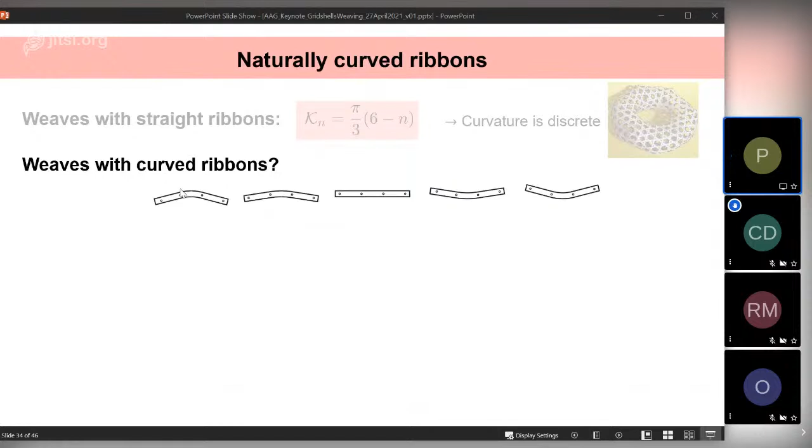Okay, so for pentagons, hexagons, and heptagons, the traditional case is the one in the center where we weave with straight ribbons, but you see when we start weaving with other shaped boomerangs, for example, we could have a hexagon exhibit positive Gauss curvature or negative Gauss curvature. And we can essentially span those smoothly as I'll show in the next couple of slides.

Okay, so now we're going to change the unit cell a little bit. So each of our ribbons is going to have 3 segments that are piecewise circular. And we can inject geodesic curvature by changing continuously each of the values of curvature, kappa 1, kappa 2, and kappa 3. Okay. And so the wonderful result, probably the central result of this part of the talk, is that by varying these kappa 1, kappa 2, and kappa 3, the piecewise curvatures of each of the 3 segments, we can now span the integrated Gauss curvature continuously. So we can essentially target and achieve any shape that we might want.

We're no longer limited by this quantized level of n, because the Gauss curvature now depends on n, as well as this quantity kappa star, which is a linear combination of all of the curvatures of the unit cell. And I won't have time to describe how we derive this. This is an analytical solution for this system. Okay. And so that is to be contrasted with discrete weaving. And so we can achieve a continuous range of curvatures.

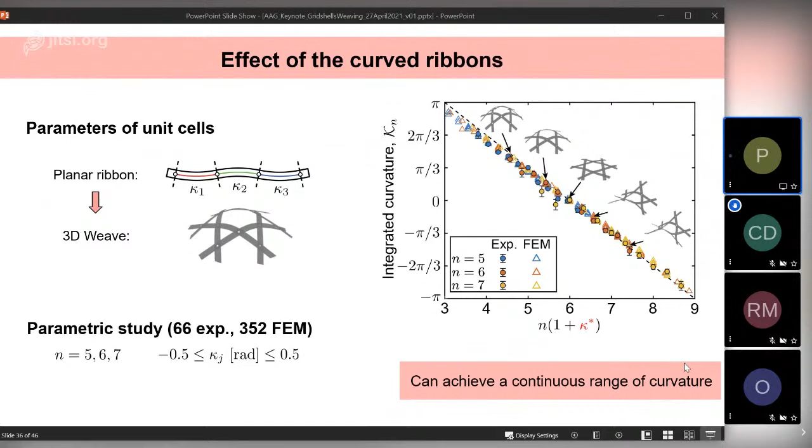Okay, so I only have a couple of minutes left, so let me quickly go to the punchline. And so if we weave with straight ribbons, that is with geodesic curvature that is 0 throughout the unit cell, we end up with a rather faceted closed shape. Whereas if we are smart about where to inject this geodesic curvature, using curved ribbons, we can now weave very smooth shapes.

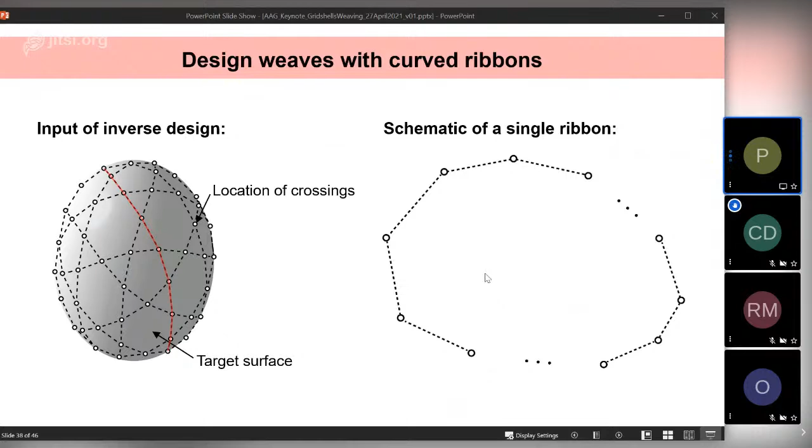Okay, so you can extend this framework to go beyond spheres, and here is a very simple inverse design procedure. I can tell you more details during discussion of how we do this. We essentially have a target shape. We define the topology on the surface. We have a graph that connects the various ribbons. We have a way to define the local geodesic curvature, which we then try to match to the target surface. And using this inverse design geometric procedure, we can now start weaving non-spherical shapes.

And so here is the example of an ellipsoid. We can do prolate and oblate ellipsoids. The ribbons now, after this optimization procedure, become a bit more complicated. So we only need 2 different ribbons for each of these 3 structures. And here are the results for the first, for the second, and for the third structure.

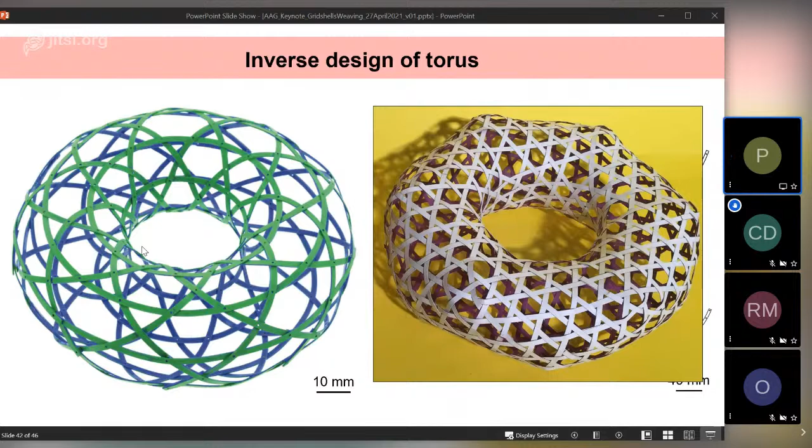And the inverse design framework also works for tori, and the number of ribbons is now a bit more complicated, but the procedure is the same that I showed earlier. And so we can compute these simple canonical shapes. And now we get back to the comparison between the traditional design procedure on the right-hand side and our new procedure using initially curved ribbons, and you see that the surface is indeed much smoother. Now you can go and quantify how different they are from the target shapes.

We have done that. So the quantification here is on radial distance as a percentage of the width of the ribbon. And essentially, in some places, we are a few millimeters off for an object that is 10 centimeters or so. Okay, so what is surprising here is that we haven't taken any elasticity into account to arrive at these structures, and so geometry is dictating everything that needs to be done. And of course, elasticity is then what's responsible for these hotspots of deviation from the target shapes.

So here, I'll take this opportunity to also mention related work that Mark Pauly and his group have done. They've essentially taken these bases of weaving with curved systems, and they've done a full optimization that also includes the elasticity of the ribbons, and they've been able to show realizations of these. Now they can do freeform. They're not restricted to the canonic shapes that I was showing you earlier, and they can produce these absolutely gorgeous structures with curved weaving.

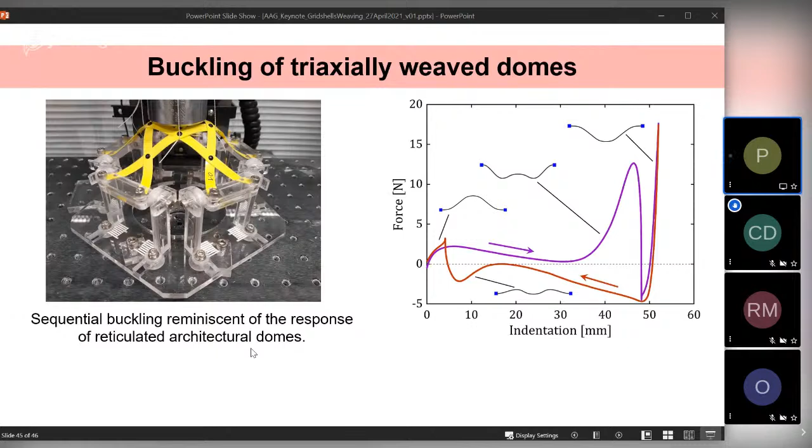Okay, so last slide before last, where we're heading next is to go beyond just geometry and try to say something about the mechanics of these systems. We are loading domes that are triaxially weaved, and we are interested in the full loading path with snap buckling and quantifying all the various stable and unstable states, and this is turning out to be really very rich ground. And in particular, by changing the geodesic curvature of the ribbons, we can also control the sequence of buckling and amplitude by tuning this curvature. We're not going to be building buildings out of these anytime soon, but from a fundamental point of view, I think there's lots of fascinating mathematical and mechanics research questions that we're addressing.

Okay, so time is almost up, so let me just wrap up by summarizing what I did. So I hope I convinced you that buckliphilia, at least through these few examples I showed you, is an exciting area for asking research questions. So buckling is not just bad, but it can be used for function, even if the function is as simple as generating shape. I showed you some aspects on the mechanics of grid shells, which I know are of interest to many of you in this community. I hope you'll enjoy this trick of using initially curved ribbons to generate smooth triaxial weaves. Here, precision model experiments at the centimetric scale, which doesn't mean they're sloppy. They're still high precision, and have been extremely valuable for us.

And again, I think there's a lot to be done with grid shells and weaves, and where we're heading is, instead of going large scale to the architectural scale, we're actually trying to take some of these principles that this community is very familiar with to go small scale and design micro scale structures. And I think that's exciting.

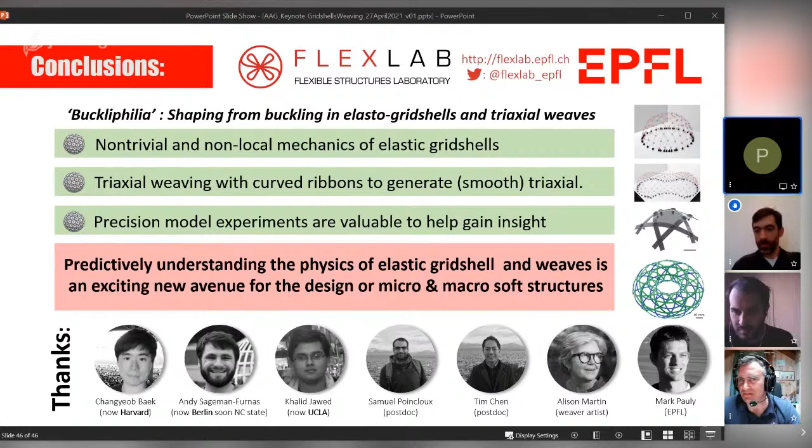Thank you very much, Pedro. Sure. Cyril, do we have any question from YouTube Live? Or Romain, did you see any? Not yet. So maybe we can try to initiate the discussion. Shall I stop sharing, Olivier, or shall I leave the slides on? Maybe you can stop sharing. Okay. So maybe Romain can initiate the questions. Yeah, thank you very much for your presentation. I found it really interesting and fascinating. Thank you. Sorry, Chris, I will just mute you. You have to stop your speaker, Chris, because there is feedback, maybe from YouTube. Can you hear me now? Yes. Good. Please, Chris. Thank you very much, Pedro. That was very interesting. You're very welcome.

I was lucky enough to have worked on the Mannheim grid shell. Oh wow! Nice.

With Ted Happold and Ian Liddell at Ove Arup and Partners, with Frei Otto, of course. And well, it's not really a question that I've got. It's more a comment, and that is that the big problem with Mannheim was creep buckling, or is creep buckling, I should say, in the sense that it was originally designed for 20 years, but it's now over 40 years old, and it's slowly creeping.